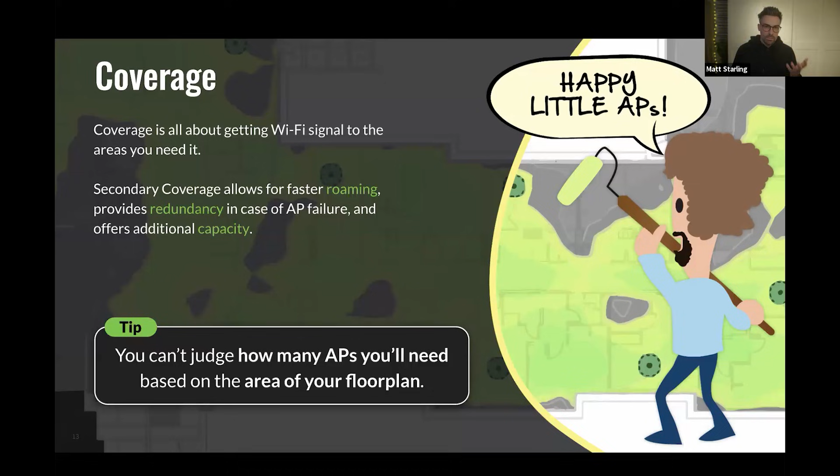Yeah, because coverage is easy, but capacity planning is something that you have to really define radio by radio and see, okay, how many clients am I expecting on 5 GHz, on 6 GHz, and what demand do I have? Because this is application by application. If you're going to run just barcode scanning or you're going to use video streams or voice calls, you're going to have different demands. So you have to estimate, you have to have a take rate, how many clients you estimate are going to be active at a single moment in time.

And then you can provide those numbers and test that in your actual design to see, can my network handle that load of my clients? This is one of the key principles, which is something you cannot measure in reality. This is something you have to estimate and you have to plan for before you can actually do the installation.

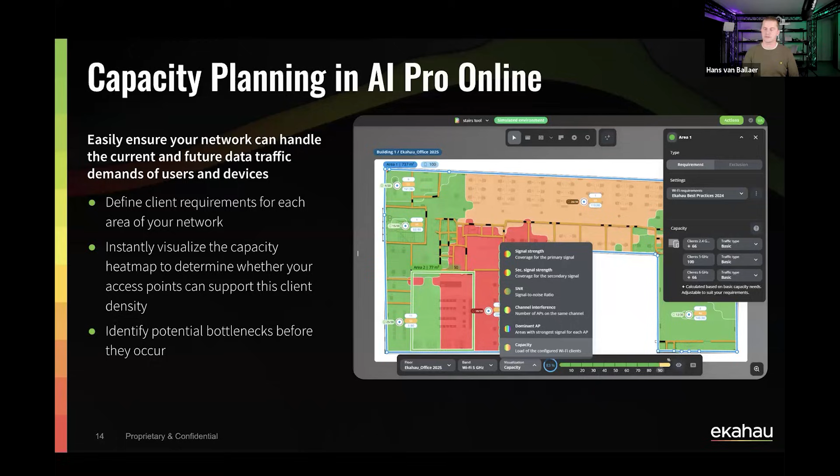Now, you have to plan, but just planning from a free space path loss perspective is not realistic because we want to plan for our clients. We want to plan for our barcode scanners, for our handheld phones. Typically, they are not the strongest. They may have lower sensitivity. They may have smaller antennas, radios.

So we need to make sure that we have the LCMI, the least capable, most important. So our business critical device that has to have a good signal, either it's Wi-Fi or other technology that we need to design for. So defining the LCMI is critical before you can do a real design.

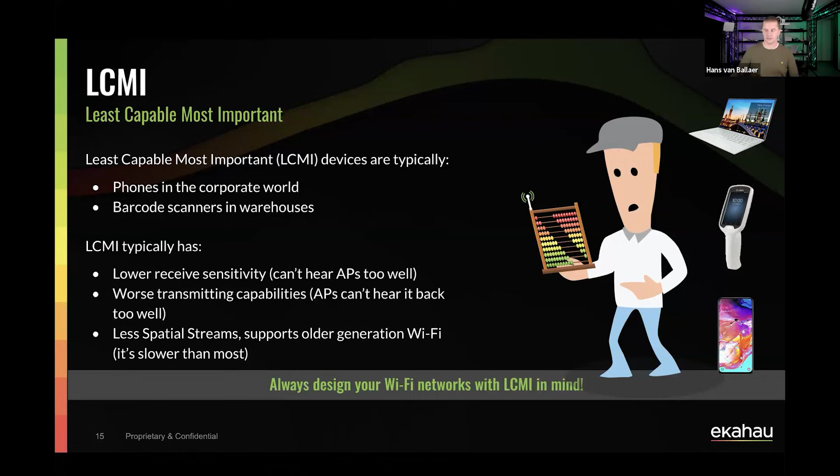Now, next to that is also your environment, your building. What kind of walls is it? Is it glass? Is it drywall? Is it brick? You want to define the right wall type. Maybe doing a wall attenuation measurement. You measure in front of the wall, you measure on the other side of the wall, and then you have a value. Okay, this is the actual value for a certain wall, and you can build your own walls. So there are some defaults in Ekahau, but you can build your own walls.

How does that all work in AI Pro Online? So we can have a two-dimensional view, we have been using that for many years, but to get a real insight, if you start using racks, if you start using equipment, furniture in your offices, how does it look like in reality? A human being is an attenuator, so how do they look if they're in front of your AP? So to show all this,

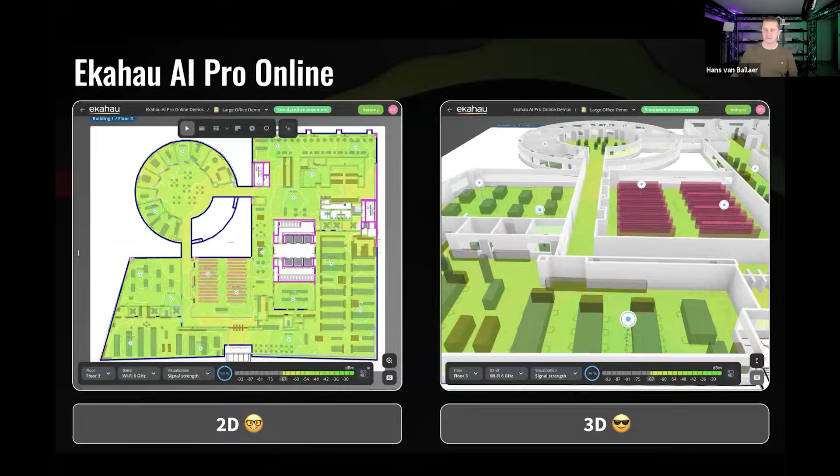Just while Hans is getting that set up, Matt, I have a question for you. Which one's more important, coverage or capacity? Can you make that distinction? Oh, that's a good question. The Wi-Fi doesn't work well if you don't have good coverage; you're not going to have a good performing Wi-Fi network. But then on the flip side, if you don't have a well-planned network for capacity and you've got too many people trying to connect and associate, they're not going to work well either. So yeah, that's a tough one to decide on.

But I think at a minimum you have to have coverage. If you don't have coverage, you're not going to have connectivity. So even if you were planning for capacity, if the coverage isn't there, those people aren't going to be able to connect. So if I had to make a decision, I know it's maybe controversial, but I'm going to lean more towards coverage.

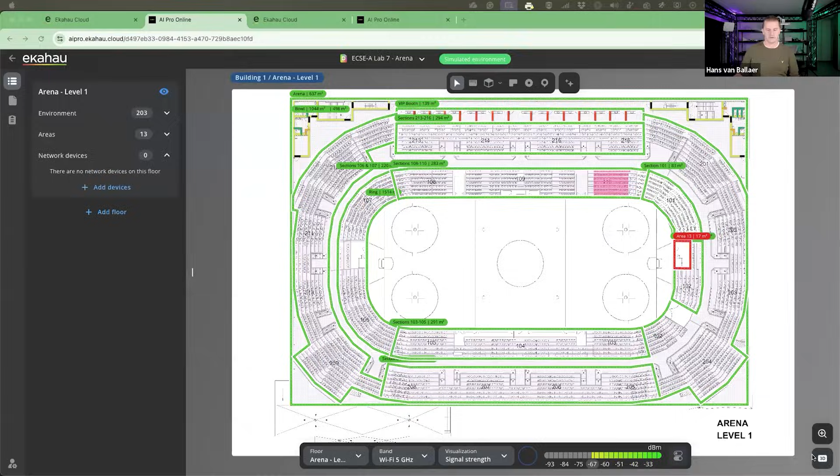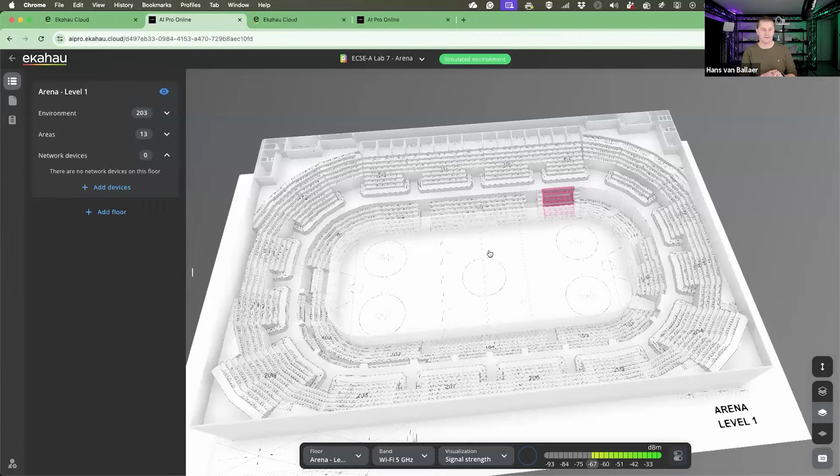Yeah, but like in this case, we have here a stadium, an arena where we can provide Wi-Fi. So we built a stadium using the elevated surfaces. Now we can design a Wi-Fi network for these kinds of environments. So you can put APs. How do you start with this? The first thing is where can you put APs? Is it in the seats, and you want to have them under seat? When you put the APs on the ceiling, is there space on the ceiling? Can you even mount them there? How should you place them?

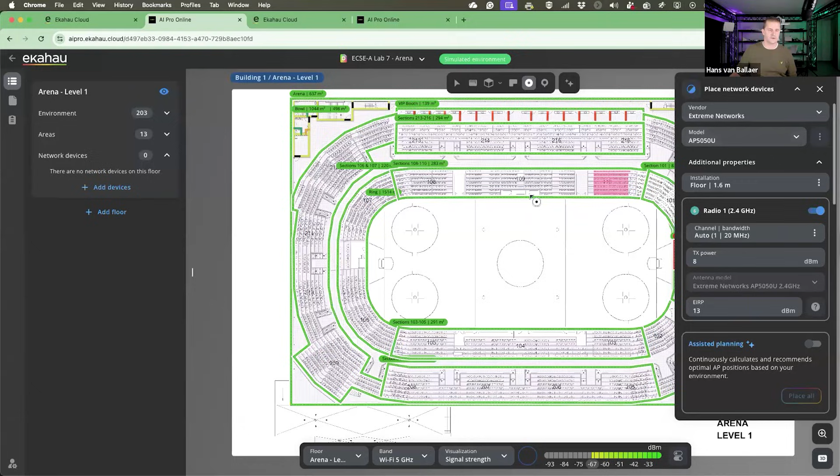So if we dive into this, if I'm going to place an AP in here, so let's take this AP. I'm going to set the height for this AP, the 5050 from Extreme. And if I place this one on the seating here, now this is the coverage that I have. So with just one AP, I can design for the whole pitch here. So I have coverage. In this case, coverage is easy.

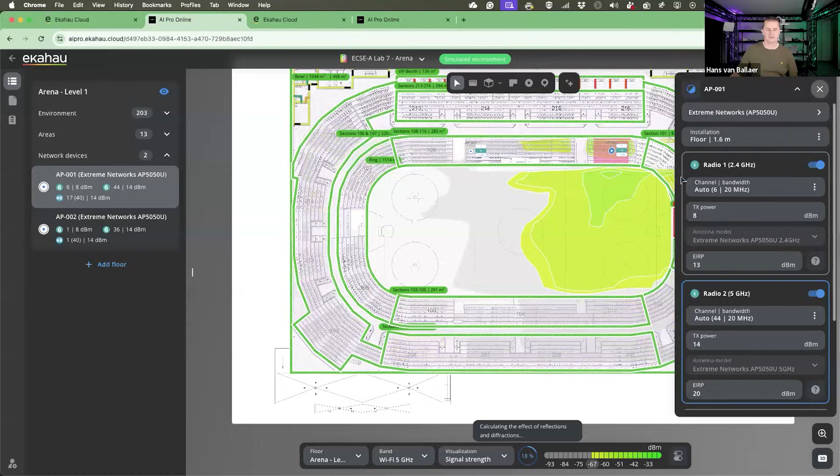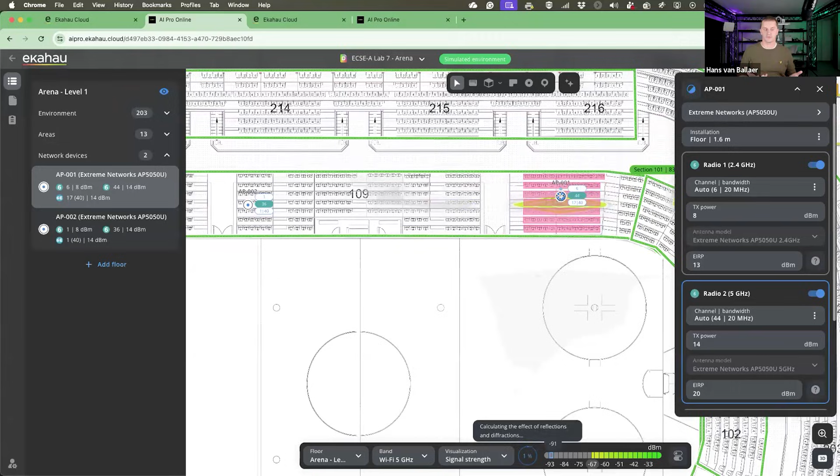But what happens if I take this AP and move it in between, where there's some people here. So in this area there's some people standing, and now the coverage for this AP, you see? Now it's in between the people. So now for these 3 rows of people, we do have coverage. So a human body is an attenuator that we need to take into consideration, because if you don't place the people in there, you're gonna have coverage everywhere. But once you start putting people in there, they're gonna block your signal.

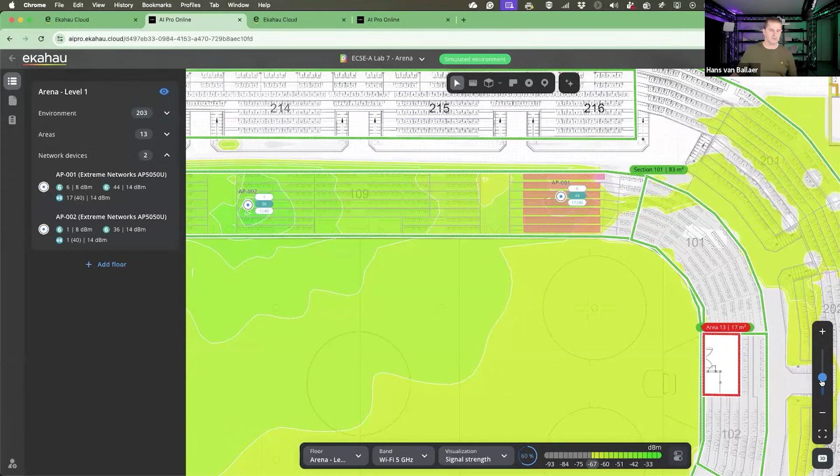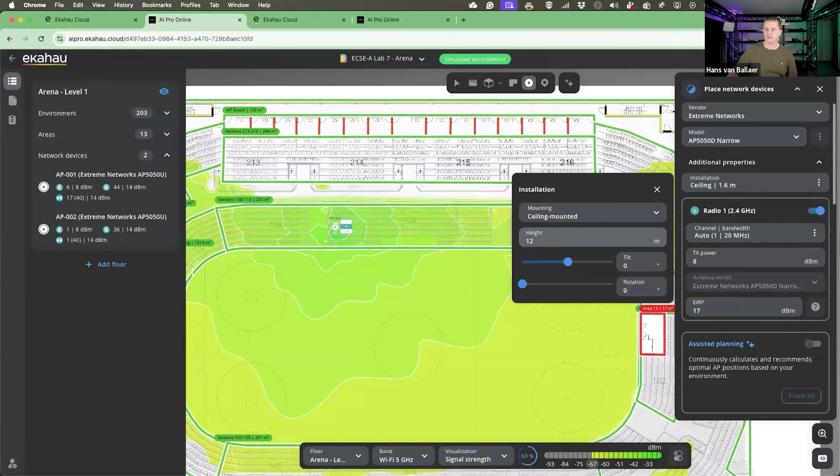Now, under seat is one of the solutions if you want to place Wi-Fi into an arena like this. Another possibility is when you put them on the ceilings. So if we take another AP from this range, we're going to take the 5050D, but now one with a narrow antenna. So we can place this one. I'm going to place it on the ceiling in this case, and I'm going to put them 12 meters high in the ceiling. So now this one, it's on the ceiling now.

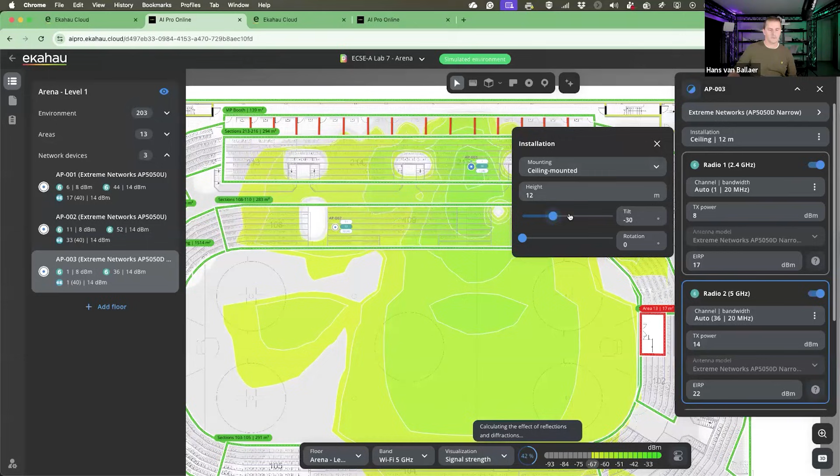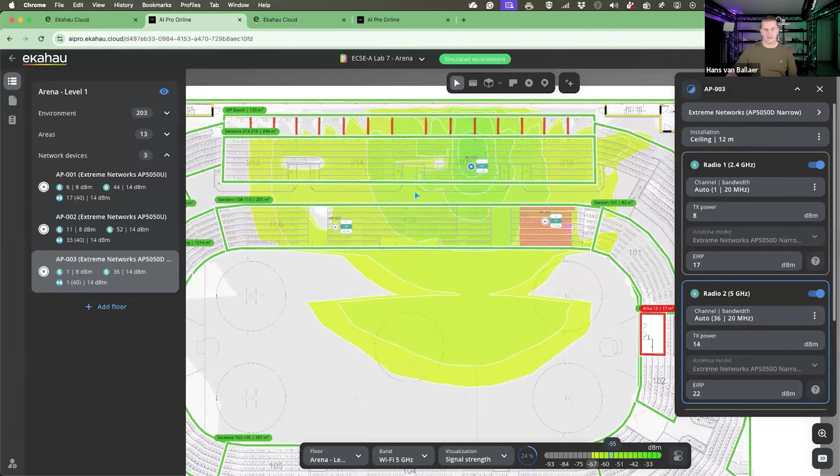Yeah? But you see, it's covering a long end. I can tilt it. So maybe I tilt it inside the arena, or I can move it away from it. So now I'm going to cover more where my people are, because typically a stadium is steep, it's going up. So in that case, I have my full coverage. Problems lie in where you're going to do cabling, and you need to do cabling. Do you have enough IDFs in there? And do I have the possibility for my cabling there?

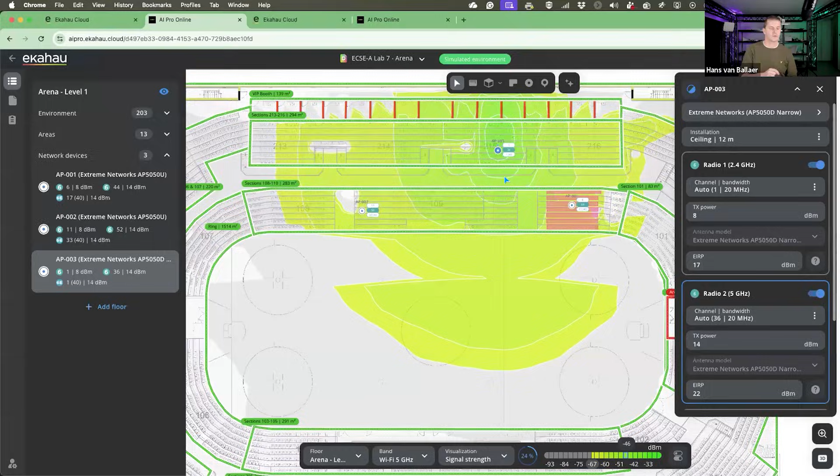But in this case, it's a stadium for sports events. What if you want to start doing concerts in this kind of stadium? Can you design for that? So you have to decide on, again, going to your design principles, getting your requirements right. Where should I place my APs to provide enough coverage?

So this way, using the seating, under seat or in the ceiling, putting Wi-Fi over there, we can have good coverage everywhere and provide the necessary capacity to have everyone in there and provide them a good Wi-Fi signal.

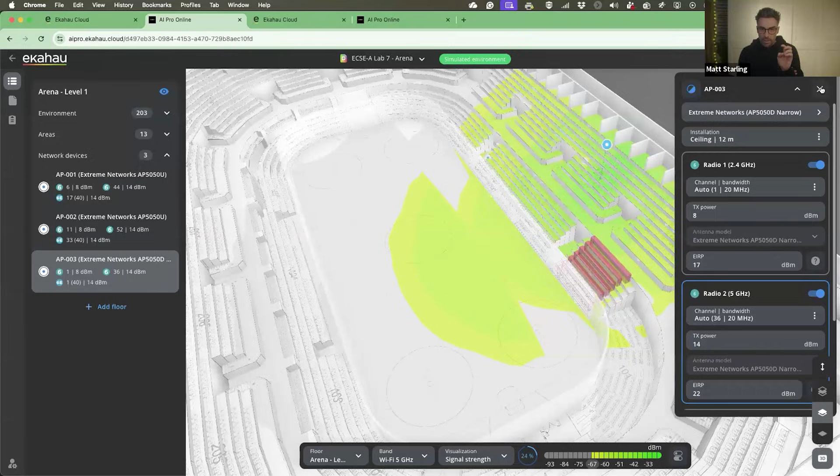So Hans, just a quick question around the arena that you've got built out here. A few people are asking about the 3D view that we have, and this advanced 3D modeling capability with the raised platforms, and you've even done some human attenuation here. And you've spoken about a few different potential design options here with under seat, overhead, and then planning for not just people in the bowl, but also for the concerts.

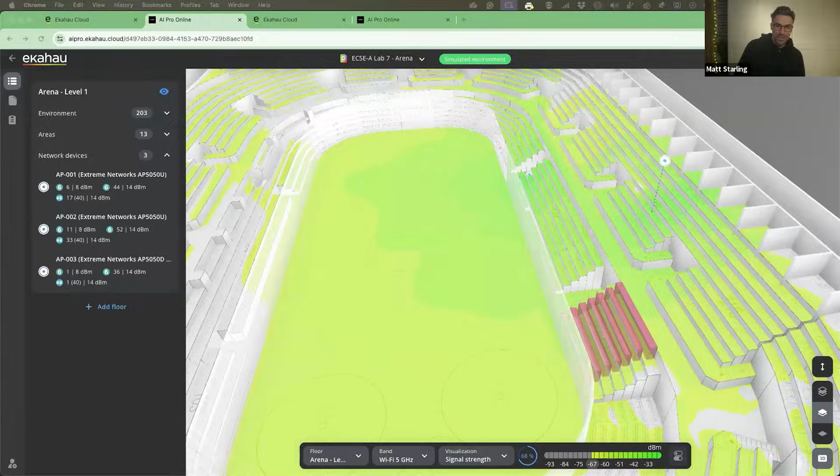But we're talking about wireless today. So actually, I think Troy, it's about time you start talking about some pie. Absolutely. Pie, one of my favorite desserts.

Yep. Right. And we're going to go beyond just designing for Wi-Fi. I find so many people in the Wi-Fi community, when we start talking about wireless and Wi-Fi, use those names interchangeably, seeing only one slice of the pie, right?

So about a week ago, I put out a post on LinkedIn promoting this webinar, talking about wireless. As I mentioned, I'm a big fan of pie, and I'm just curious, maybe in the chat, just drop in your favorite pie. Mine happens to be Saskatoon berry pie served warm with a dollop of vanilla ice cream, right?

But if we look at a wireless pie, if we just wanted to expand our taste buds a little bit, we could start looking at things like BLE, ultra-wideband, private 4G and 5G, or even some of those other IoT technologies that we're seeing built into some access points coming out on the market that include Zigbee radios, setting us up for Matter, another IoT technology, a lot of these built on the IEEE 802.15.4 standard itself, right?

So we're going to follow up now with a breakdown of different wireless technologies that we can include and look at use cases that they offer to augment your ability to meet your customers' business requirements, right? Because as great as Wi-Fi is, sometimes it's not the only or the best solution to the problem. So let's take a look at that now.

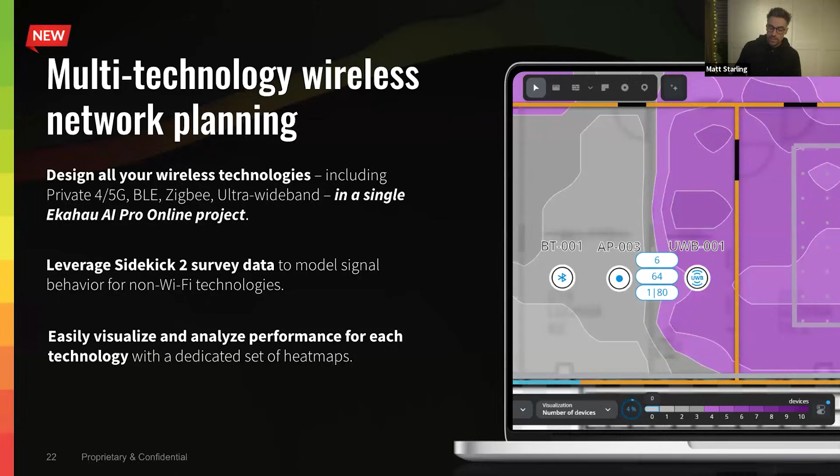But we actually have a really nice, cool way that you can design for these technologies by using your Sidekick 2 data collected of the Wi-Fi environment. So if you've done a survey of your environment with the Sidekick 2, even going back 3 or 4 years ago, if you push that data to Ekahau AI Pro Online, we will use our machine learning and AI algorithms to understand how RF propagates in your environment. You can then plan to move your Wi-Fi access points around or do a redesign.

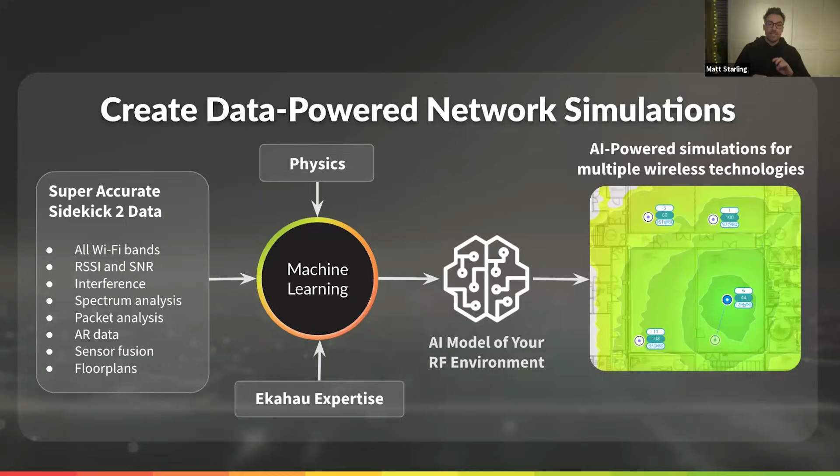But also, if you want to plan and design for other technologies such as cellular, ultra-wideband, or Bluetooth, you can place those devices and see the heat maps update based on the measured data you collected with your Sidekick 2, which is pretty cool. Troy's going to give you a nice live demo of that coming up shortly later today.

And actually, we're going to jump into that right now and give you guys a demo of what that looks like. So I can flip to an existing project.

As Matt pointed out, this is one of the values that the Sidekick 2 brings you: if you've done a survey, even one performed 5 years ago, as long as you followed best practices, like walking on both sides of the wall and making sure you went into all the rooms, if you have that data with the measurements collected, we can now, thanks to our R&D team here at Ookla and Ekahau, use it.

They've confirmed that we can derive and estimate the signal attenuation and propagation effects across multiple frequencies, because the wireless IoT technologies we're talking about today, private 4G and 5G, use frequencies outside what we're used to for Wi-Fi. We can still leverage the data we collected to estimate the impacts of attenuation objects like walls, machinery, and warehouse racks. That gives you an idea as you build these models of where to best place these access points or RAN radios to get good coverage.

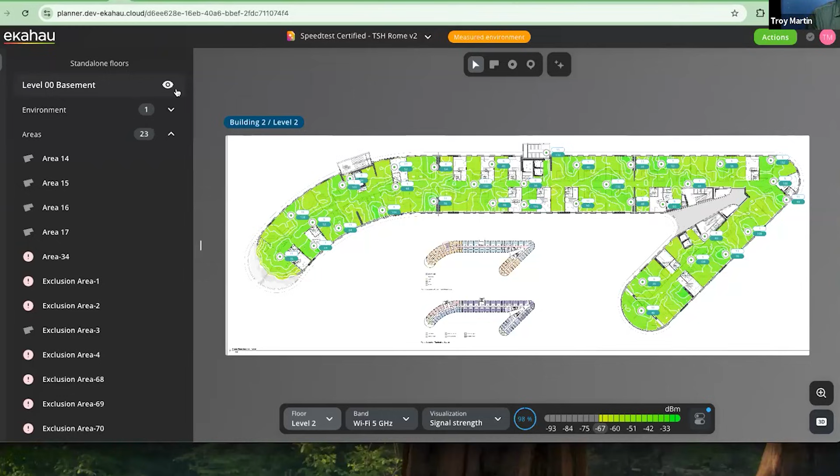All right, so here we have an existing deployment. Let's just jump to the basement floor here and pretend that we're putting APs in the basement. And we see a heat map that we're very used to looking at, showing us Wi-Fi signals and Wi-Fi performance.

But I can go ahead and select from my list now in my technology dropdown. I get a list of multiple wireless technologies and devices that I can add — this could include things like Wi-Fi, Bluetooth, cellular, private 4G, 5G, Zigbee, and ultra-wideband. We'll be giving you demos of all these wireless technologies later on in the webinar.

But what I want to focus on here is if I pick, just as an example, cellular 4G — once I've selected that, I then have the ability to choose multiple frequency bands. Now, unfortunately, at this time we don't have an exhaustive list of all the private 4G, 5G frequency bands that could be there. This is an evolving list, and as we add more products to our AI Pro Online, the list will expand to include more frequency ranges. But for this demo, I just want to focus on the CBRS band.

So if you've heard of band 48, that's the CBRS band commonly used in the US. From this list, we have a list of different manufacturers, and again, not exhaustive, but we're aggressively looking at populating this list with additional manufacturers. So if you see AP models or radio products you want to use in your deployments that aren't included on this list, reach out and we will get them added as quickly as possible.

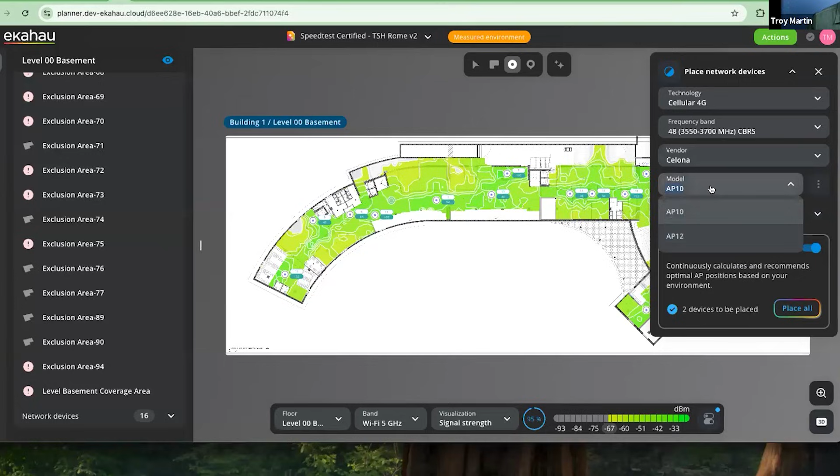So if I focused on Celona, grabbed one of their products, I can then drop it in. And if I zoom in on this, we can see the coverage of this AP. As I move in and out of rooms where I measure the attenuation, we can see the impact of the measured data across my different environment. So then I could use this to try to figure out what's the ideal placement for positioning this radio to give myself the best coverage that I need.

Obviously, you can tune the transmit power, set it to what's reasonable for your deployments. If you wanted to create smaller cells, add in additional radios for overlapping coverage and redundancy in case the uplink Ethernet connection got cut or severed, you could do that as part of your design. But you have lots of different options of what you want to achieve as you go through this.

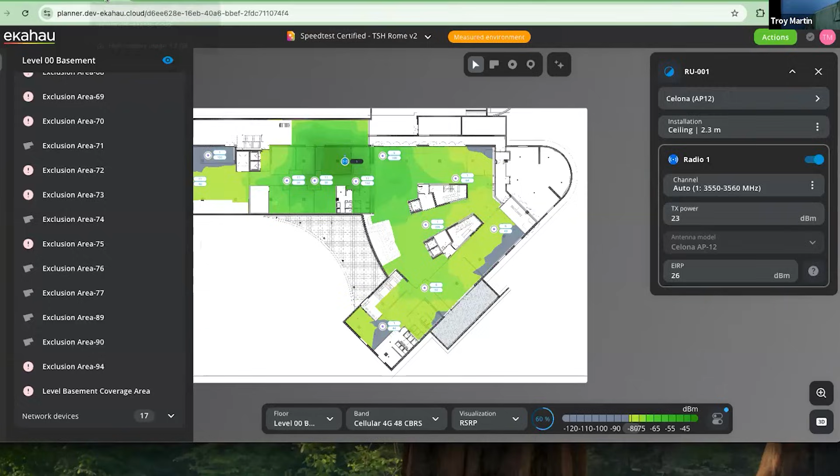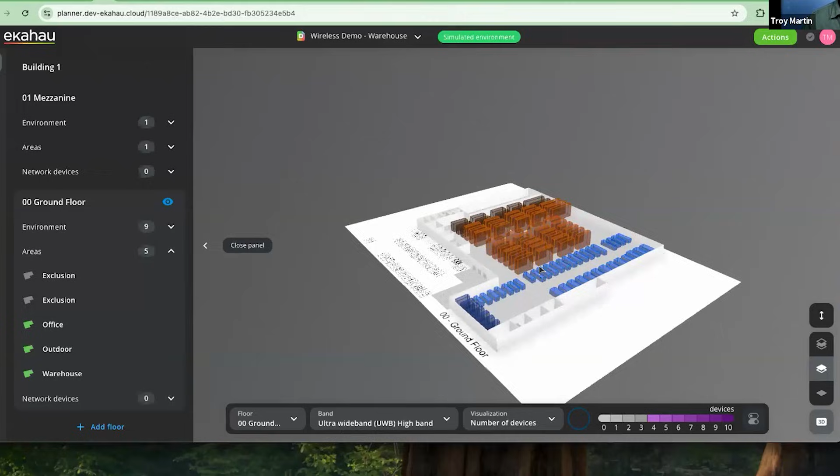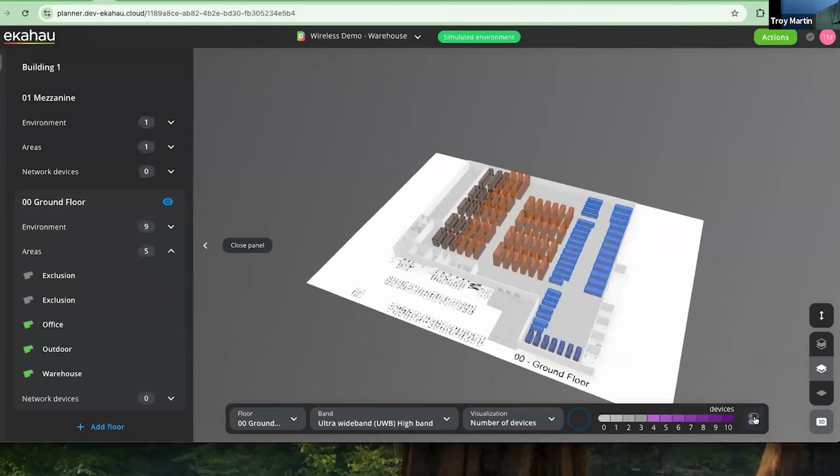We could also look at another scenario. So not only can we grab an attenuation model for an existing deployment, we could look at a net new design if we wanted to consider something like that. So in this scenario here, we have a warehouse design, and leveraging AI Pro Online, we can model this in 3D. We have the warehouse racks at various heights, representing different styles of shelving and material, different blocks representing perhaps some machinery items, or giant water tanks, if you think of mechanical areas in various buildings, and of course the doors and office space that you typically find in various environments.

By clicking on the device tool here, we have the typical Wi-Fi devices that you're used to seeing, but then we can break down and look at many different other components. One thing to keep in mind is that some devices, when we pick these, sometimes we're looking at devices that only perform one function. So in the 4G section, that'd be devices that are generally only 4G capable. Whereas if you were to add an access point that had an integrated BLE radio and Zigbee or ultra-wideband in it, maybe select that from the Wi-Fi drop-down list to add that device, but then we can apply the right visualizations to look at that.

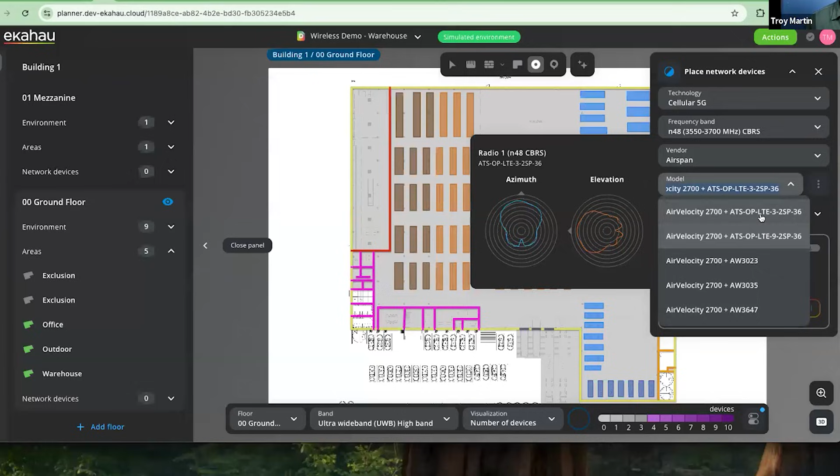So if I look again, actually, let's try 5G. Let's think towards the future. Try a new radio. We can grab Airspan as a vendor, and I could drop these in. So a few different models with some different antenna options that we could use and select.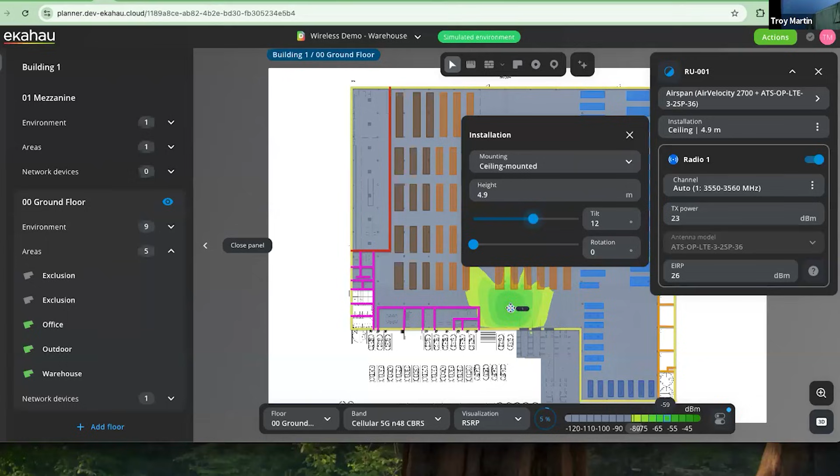And if I was to place one of these into this design, I have my access point mounted up into the ceiling, and by default, for this AP, it's being placed up at the height of my warehouse, 4.9 meters, but it's positioned on the wall. So if I come in here, I can play with this and I could ceiling mount this access point to give it a little bit of a focus down towards the ground. I can also adjust the tilt, give it a different tilt and orientation, move this access point around to try to deliver the coverage that I'd like to see at this site.

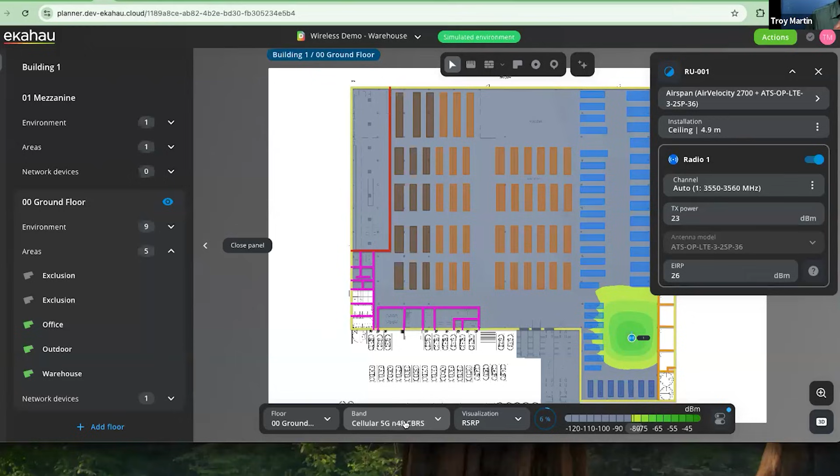And so here we're almost looking at a Pico level design, where we're covering very small areas, very focused environments to get us the specific coverage we're looking at. In my visualizations here, you can see that because I've just deployed a 5G radio, my visualization changes to look at heat maps specific to the private 4G, 5G technologies. So I can look at things like my RSRP, and this is sort of where I find it's not exactly the same thing, but it's quite similar to what we're used to looking at with RSSI. I find that in the cellular space and the Wi-Fi space, we often change names of things. Sometimes it seems just to come up with a different name.

If you look at OFDMA as an example, in Wi-Fi we call them resource units or RUs, the individual subcarriers. But in cellular, when they talk about OFDMA, we call them resource blocks. Same concept, but we have to give them different names, which I find a little bit interesting.

So very similar concepts to primary, secondary, RSSI. We have the RSRPs. You have your signal to noise ratios or signal to interference noise ratios that you can use and visualize to measure your performance. So very similar to what you're used to when performing Wi-Fi design.

Now within the same product, all integrated within AI Pro Online, you can look at not only just Wi-Fi, but also your private 4G and 5G designs. All in one product, and then easily switch between those heat maps and visualizations to put together your complete projects, which can then deliver on all of the design requirements to meet your business and technology objectives for the projects that you're working on.

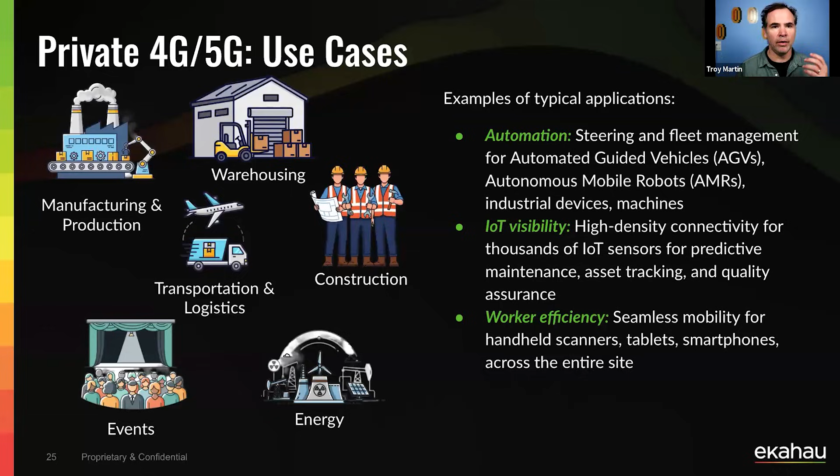They're trimming the grass, keeping it from getting too tall, too long. But you want to make sure that where your sheep are on the field, that they're all accounted for - keeping track on your livestock assets, or it could be robots tearing around a warehouse environment. So lots of different applications for using 4G at large distances, or in specific scenarios where you need to guarantee low latency for delivery of safety instructions, either to open and close equipment, turning off motors to prevent loss of limbs of people working on conveyor belts or other pieces of very large and powerful equipment.

Okay, and then we just walked through that private 4G, 5G demo for you guys there, right? Now we do have default values built into the software, right, to give you a guide. But often I kind of laugh when we have big debates about what should the default values be, and then is that the right default value? Defaults are a starting point, right, to get you going out of the gate. Obviously, you could use them if that's what you wanted to use.

But if you need to refine your design, you are the owner, you're the designer of that system. So pick the appropriate values that you need, again, to deliver on those design requirements. The system settings are a good starting point with those default values to get you going, but you can tweak those as you need. And that goes across all the wireless technologies.

All right, so let's jump into the next wireless technology, and I'll hand the floor back over to Hans to guide us through Zigbee. Yeah. So Zigbee, where are we going to use Zigbee? Typically for home automation or building automation. One of the key features there is it's going to build a mesh. So all the adapters are going to build a mesh with each other, so you can hop between different routers, Zigbee routers, to build the full channel.

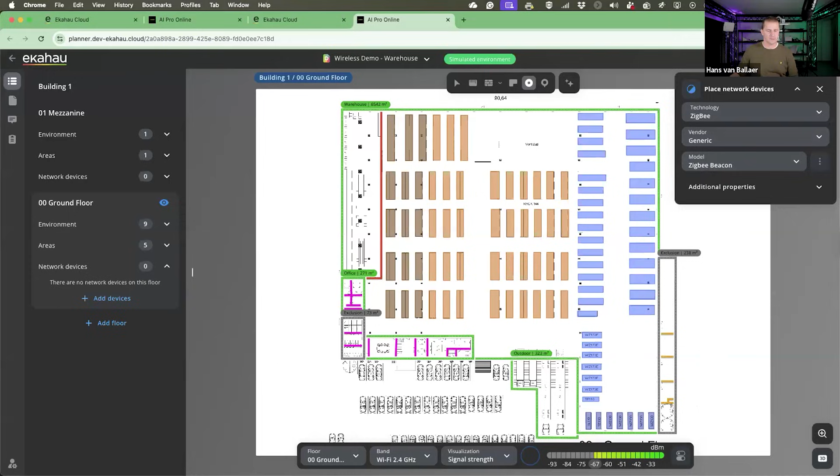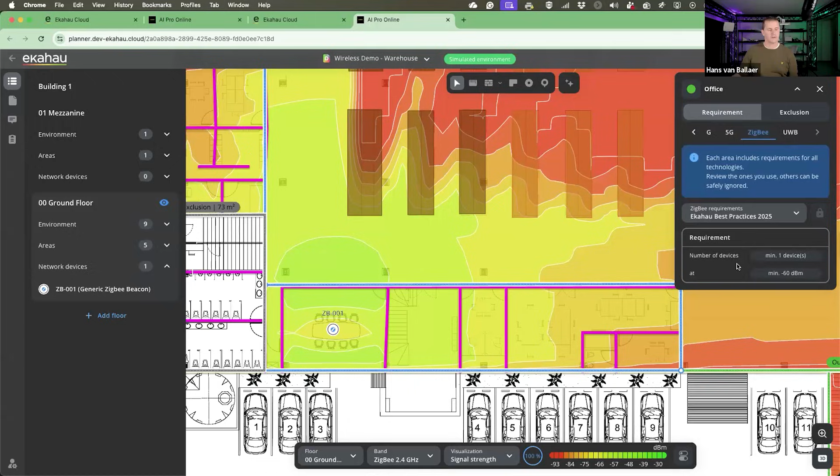I'm going to focus here on the offices because we need a smart lighting system for our offices. So I'm going to put a light beacon, a Zigbee beacon, inside our office. And this way, I can see in my 2.4 gigahertz my signal strength for this area. Now, again, it's all about requirements. So in our areas, we can define requirements where we say for one device, we want to see at least one Zigbee beacon within -60.

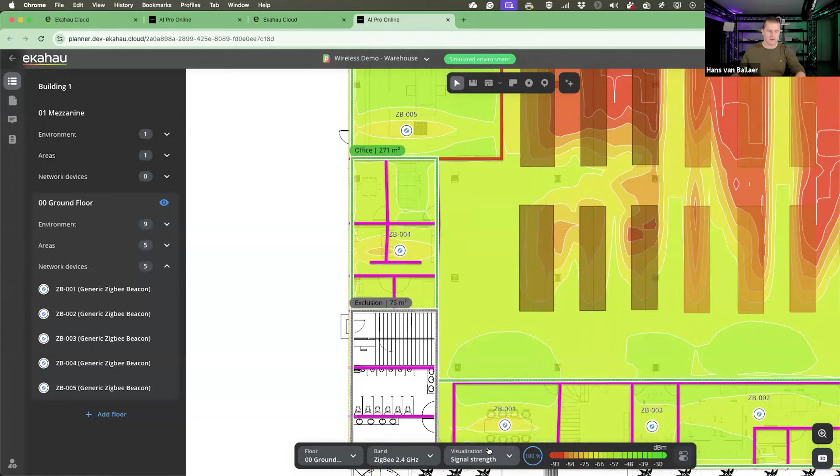So in this way, we can start designing for Zigbee beacons to be placed in your building to make sure you have enough coverage for all your smart building automation. So using Zigbee, maybe if I change my visualization to number of devices, now I can see where I have my signal. Maybe I need to add a few more so I can see my areas where I can apply this Zigbee automation.

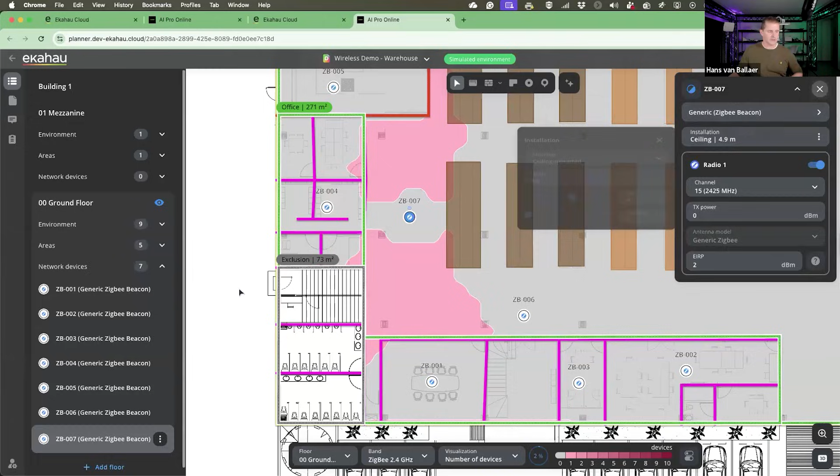Again, these are now pretty high on the ceiling, so maybe lower them to get them closer to your devices. So by lowering them, let's do this for all of them, maybe change them to like 3 meters. So you see, it's going to be a big change to put them closer to your clients, and this is going to work out for you. So placing beacons and placing the Zigbee, we can do this right now using AI Pro Online.

What do you want to remember there? Maybe if you have a gateway, a smart hub, like for light bulbs, you want to add a second one, because if your gateway is broken or malfunctioning, you do want to be able to steer your lights for your building automation. So plan for redundancy. Also, you don't want to put your beacons too far away from each other. If I put them too high, I'm not going to have enough signal. So place them right, and don't put them more than like 50 meters away from each other.

The Zigbee is going to find its way. It's having 16 channels in 2.4 gigahertz, so it'll find a way, and it'll be resilient, just for use in 2.4.

But on the subject of technologies that operate in 2.4 gigahertz, maybe we can touch on BLE or Bluetooth Low Energy? Because I think probably everybody and their children or mothers or fathers have got some sort of BLE devices. If you've got a watch, headphones, mouse, trackpad, keyboard, they all use BLE, and it operates in the 2.4 gigahertz frequency band.

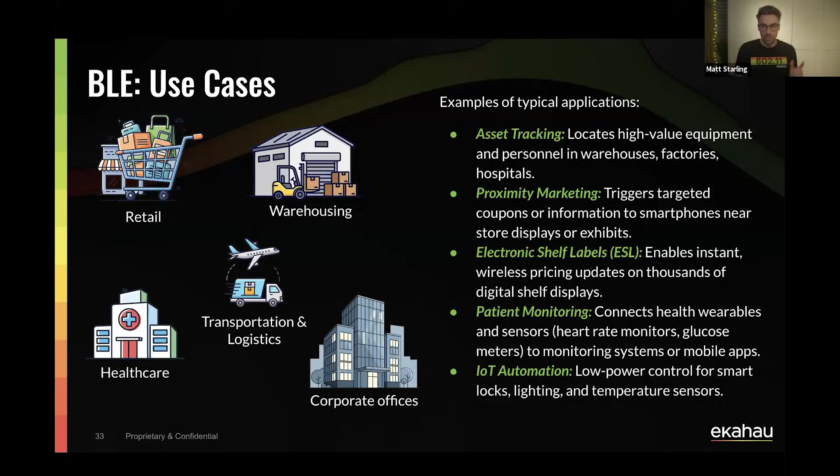And Bluetooth, you can see now if I do a quick demo. So this is our AI Pro Online. I placed an access point here, and you can see multiple different types of radios. We've got our Wi-Fi radios, a Bluetooth radio, and the ultra-wideband radio. So if I put a Wi-Fi access point that's got a radio supported with Bluetooth, and let's say I wanted to plan for good asset management or wayfinding via BLE, I can change this visualization to go to Bluetooth.

Then maybe I want to add in a couple of extra access points. Maybe I want to put one somewhere like this, but I don't want to just see the signal strength. I want to look at the number of devices that can be heard. Perhaps I don't want to just keep placing Wi-Fi access points. One of the options, if I go back to the device tool, is we don't have to just place the full access point with all of the different radios.

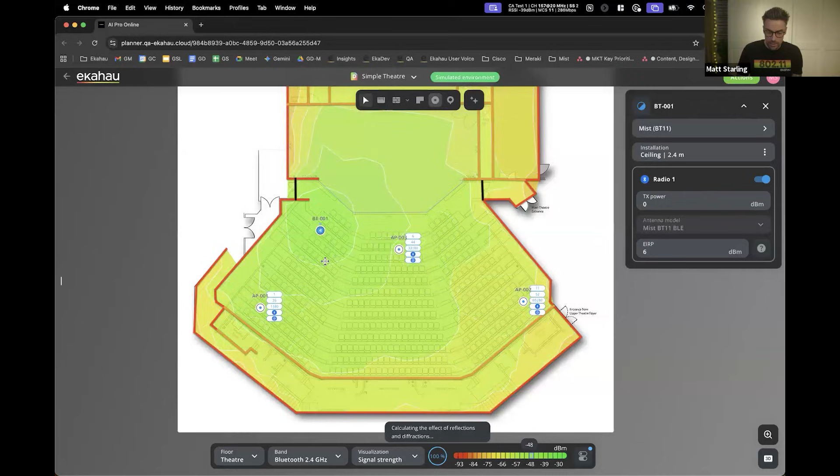We could potentially just place, if I go to Bluetooth, I can pick, say, a Mist, for example, and I can start supplementing my plan with additional devices to supplement the Bluetooth coverage that I'm looking to achieve, to be able to hear the number of devices that can be heard, so I can get a good level of accuracy of asset management and tracking as people are going through the building. So you don't have to place the full-blown access point that has all of the different radios. You can supplement them with other beacons as well. So that was a quick demo for our BLE.

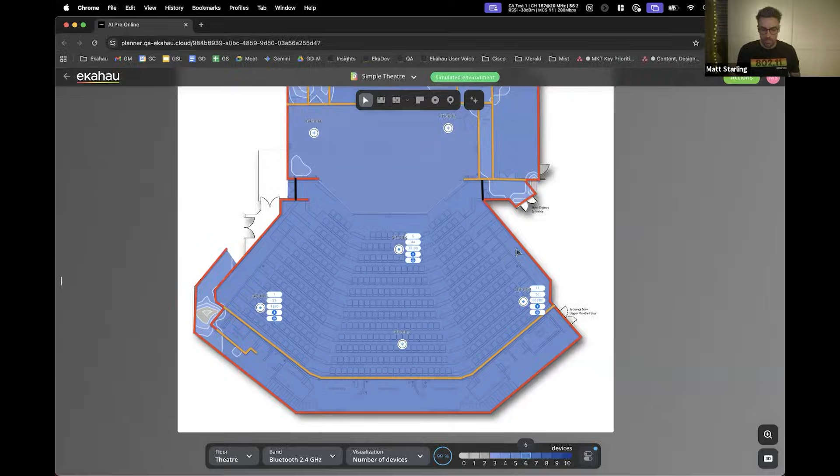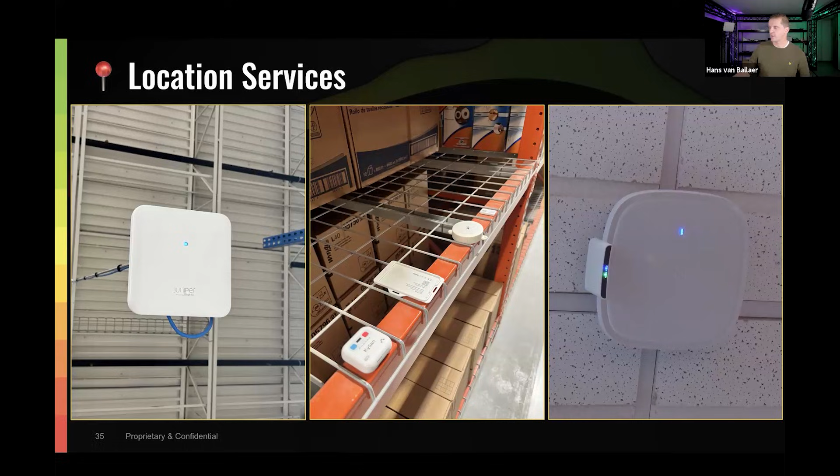So yeah, I did touch on it a little bit, right, Hans, about how location services could be one of the big reasons why you want to leverage BLE. Yeah. So if you want to get more accuracy, BLE can be a good solution.

But when you want to do asset tracking or some proximity, so if it's close to something, depending on the use case for your location asset tracking, what's the use case? What do you want to track? How close do you want to be? Because sometimes some technologies are like 3, 4, 5 meters.

Wi-Fi was like 50 meters before, but the accuracy is key here. How close do you want to get? And this is where the different technologies come into play, and that's where again coming back to requirements, design and check what you want to do. Ultra-wideband is sub 1 meter, so if you do it right, you can have a few centimeters accuracy. BLE 3 to 5, depending what you want to do.

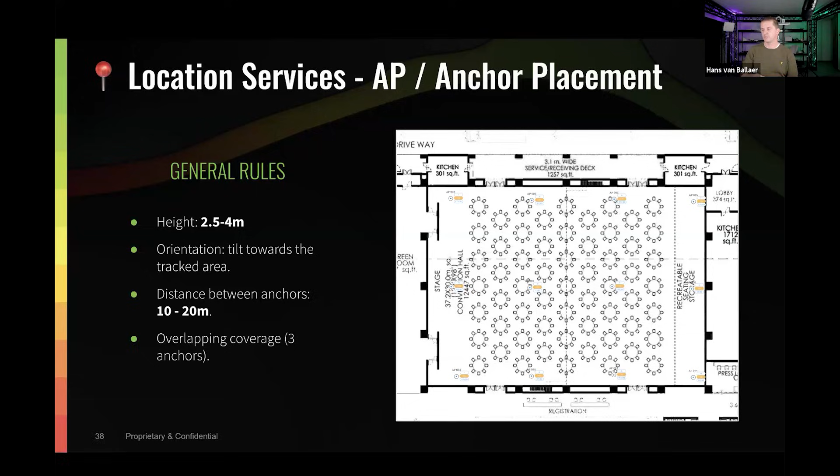Now the APs, again, don't put them too high, because if you're in a 10-meter high warehouse, you don't want to put the APs there. So maximum height like 2.5 to 4 meters. And don't put them too wide, because you want to build an area, like a zone, a perimeter. So you know in this area I want to have my accuracy, my asset tracking. We need to have three anchors at least so we can triangulate, but maybe 4 to have more accuracy. The more the better in this case.

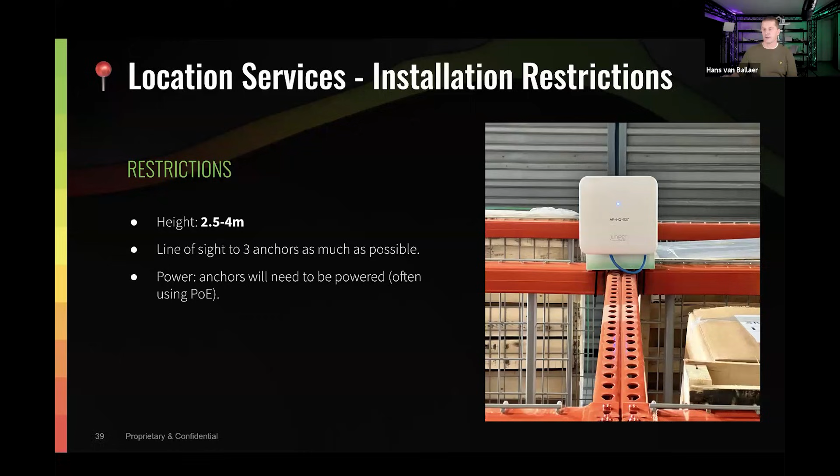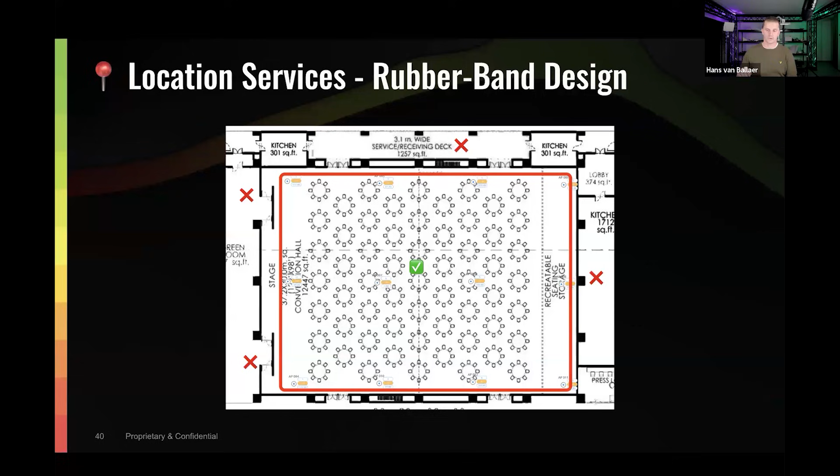Now, where are you going to place them? Again, don't put them too far and put them in line of sight because they need to triangulate to each other. They need to see where you are, where you're going. So line of sight is very important there, so you have a good accuracy. And place them around your building, around your office or area where you want to have the tracking, so anywhere you go, you have your accuracy.

Now, ultra-wideband is playing in a large spectrum from 3.1 to 10 gigahertz, but we need to have this high precision. If you want to be really accurate, ultra-wideband is where you want to go. It doesn't have very high range, but it can be extremely accurate and has low power. It's using 500 megahertz channel width. But by doing a good placement, we can have the accuracy we want.

Now, where do we need this? In healthcare, if you want to track people, a pump or beds, or in manufacturing if you want to track AGVs or something like that. There's asset tracking of people also for accidents, like in construction or warehousing. If someone's coming with a forklift, they get a beeping sound or a warning, so maybe you can avoid a collision there. So like geofencing. Like Matt showed you already with BLE, we can do the same thing with ultra-wideband.

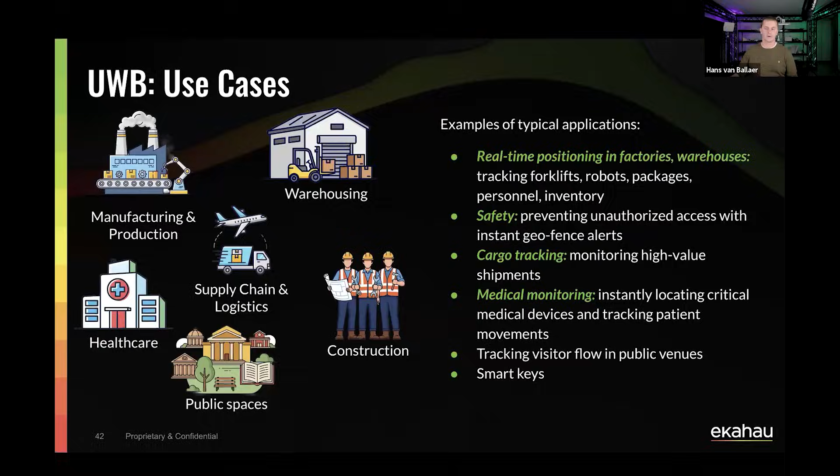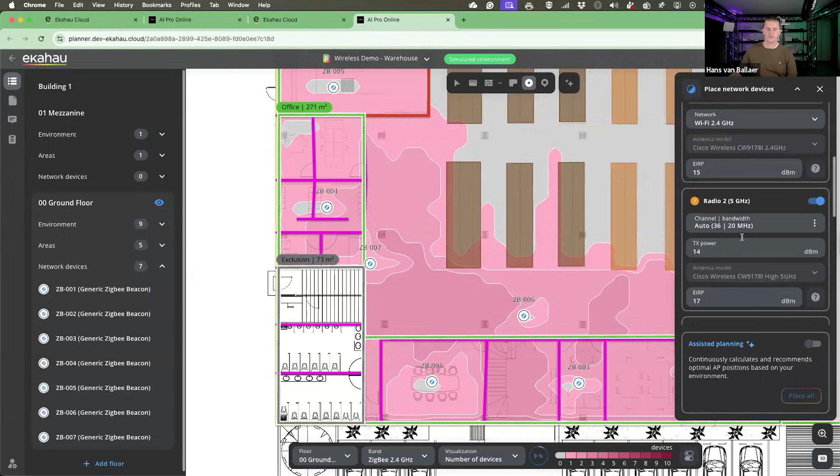So here again a quick demo for ultra-wideband. I did Zigbee already, but now I can place more APs in there. If I go back to my Wi-Fi and take, for instance, a Cisco AP, my 9178, I have my radios. As Matt mentioned, you now have additional radios. Radio 5 is our ultra-wideband radio. I'm using this on channel 9. I can change my TX power, so I'm going to design for minus 3 dB because ultra-wideband is low power.

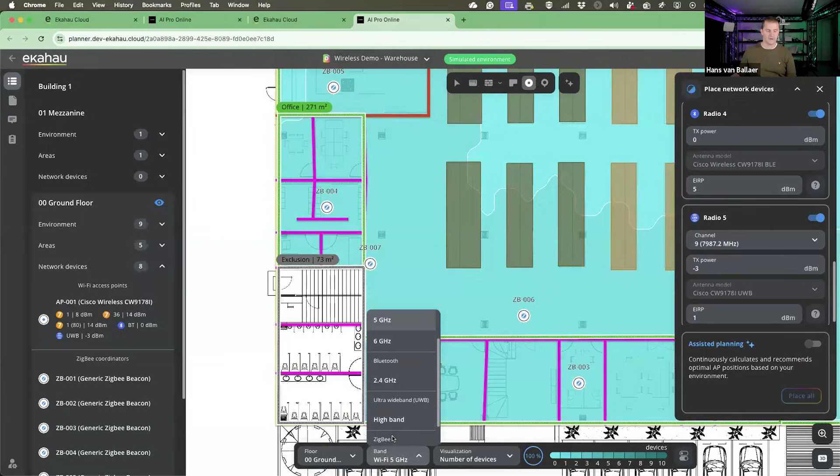So now I can place one AP there. I have my Wi-Fi, but now I also have my ultra-wideband location. But again, the height is set to 4.9 meters. We said don't go beyond 4 meters, so I'm going to lower this a bit so my AP is not too high. And now I can place more, because I want to have my accuracy. There we go. And now in this area, I can hear my clients.

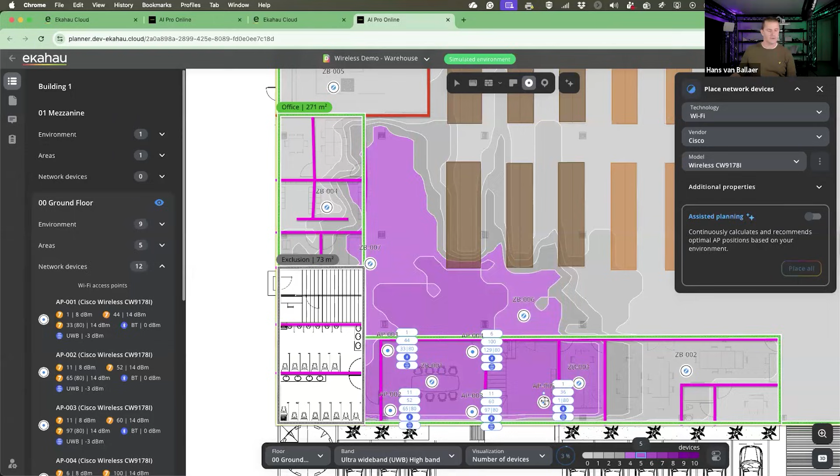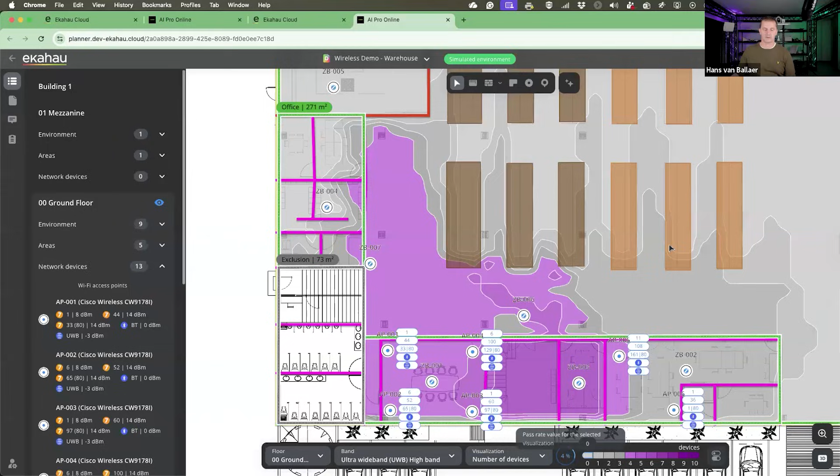So by setting my APs, I can provide my accuracy in my offices. Anywhere I go now, I can find my people. As default requirements for ultra-wideband, we now have Cisco Spaces, asset tracking, and wayfinding. So if you want to do wayfinding or asset tracking, we can define these requirements. They are basically built into your AI Pro Online by default.

Thank you, Hans. And Hans, we probably didn't mention it earlier very clearly. Actually, you are one of our amazing Ekahau ECSE instructors, I think one of probably about 15 instructors that we have that teach our ECSE classes globally.

And on the subject of training and education, I see a lot of people ask some questions, especially in the Q&A, around how you can level up your knowledge when it comes to Wi-Fi and using the Ekahau tools. Well, we have a pool of like 15 of the best instructors that can cover all parts of the world and in many different languages. So, depending on where you are and what time zone you're in, you can find an instructor that'll be able to teach a class in your region and in your language.

Also, we have 3 different 4-day instructor-led classes that can be delivered either virtually or in person. So the ECSE design, advanced and troubleshooting, and they're very tailored specific for what you would like to achieve from learning. So if it's really about getting a good understanding about Wi-Fi, designing Wi-Fi networks, how to use the Ekahau tools, getting that good fundamental baseline knowledge, then the design class is a great class for you.

Once you've achieved the design class, you can then go on and take our advanced class that has been just recently updated, and I'll go into the agenda of that in the next slide, but we really wanted to focus on key aspects like advanced designs using the complex 3D modeling that we can do now in AI Pro Online, advanced troubleshooting, advanced surveying techniques, and also a few more complex things around floor plan manipulation.